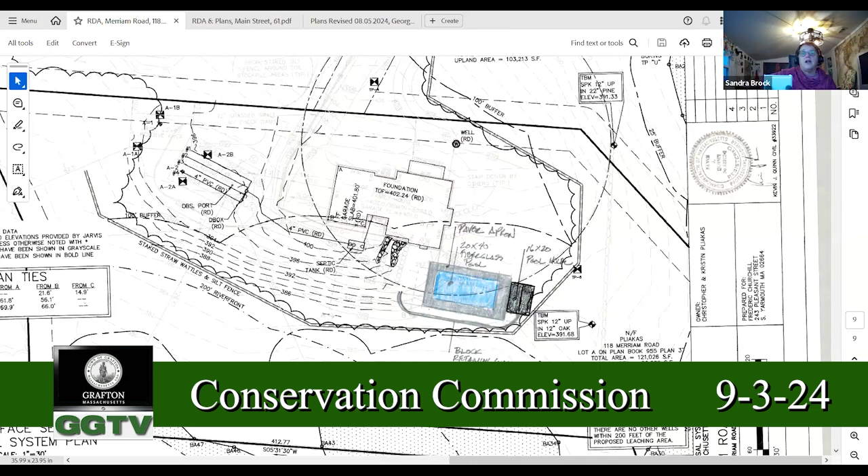So, all excellent. Right. Jan, anyone from the public? Nothing from the public. All right, great. Having said that, let's see here. Patrick, did you have any other questions or recommendations? No, nothing else. Okay, so based on that, I have nothing else. So do I have a motion to issue a negative determination for 118 Merriam Road?

I'll move to close the hearing and issue a negative determination with the conditions as discussed. Thank you. I have a second. Second. Okay, we'll do a roll call vote. Well, Jonathan, you're looking at me, so you go first. Yes. Travis, yes. Patrick, yes. I am also a yes. So that's a negative determination.

So just reach out to staff and they'll give you the details on when it will be available. Fantastic. Thank you. All right, good luck. Thank you. Good night. Good night. All right.

Next up, we're still on here. So, pursuant to the Massachusetts Wetlands Protection Act and the Grafton Wetlands Protection Bylaw, the Conservation Commission will hold a public hearing to act upon a request for determination of applicability for soil borings and construction of monitoring wells at 61 Main Street. And who's here to present that? Hi, Madam Chair. My name is Fiona Coughlin. I'm the town planner for the town of Grafton. I'll be doing an introduction, and I'm joined by Katie Wilkins of Tighe and Bond, who will also be presenting. You have the floor. Great.

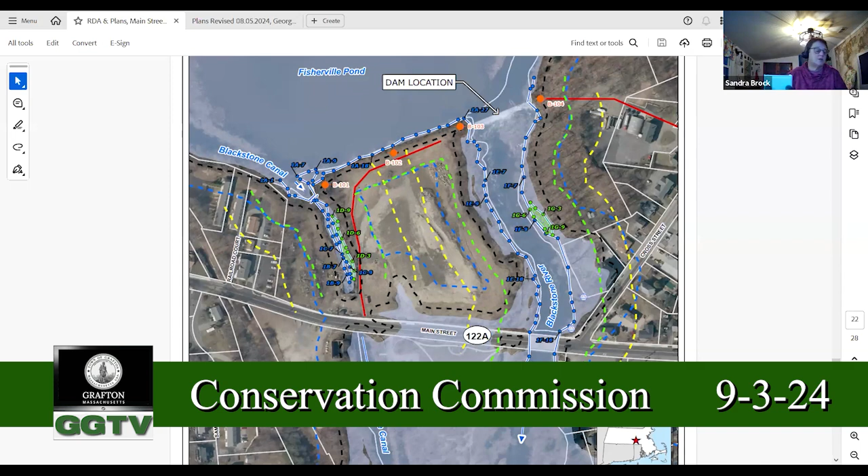No, this is under our local bylaw, so we need that. Okay, so it's just to grant the waiver under no disturb. So I'll move to grant a waiver for work in the no disturb buffer for 61 Main Street. All right. Do I have a second? Second. Okay, a motion, a second, roll call vote. Travis? Yes. Jonathan? Yes. Patrick? Yes. And I am also a yes, so the motion carries for the waiver. Okay. So that's that. And then we've already reviewed conditions. So do I have a motion to issue a negative determination for 61 Main Street?

I'll move to issue a negative determination with the conditions as discussed for 61 Main Street. Thank you. Second. We got a motion and a second. Roll call vote. Travis, yes. Patrick, yes. Jonathan, yes. I am also a yes. The motion carries. Good luck in your monitoring and boring excavation stuff. Thank you. Okay. Thank you very much.

All right. We can keep on going. We're still okay on time. Okay. This one here, that's that.

Okay, next up, 725. Pursuant to the Massachusetts Wetlands Protection Act, Grafton Stormwater Management Bylaw, Grafton Wetlands Protection Bylaw, the Conservation Commission will act upon a notice of intent application, Grafton Stormwater Bylaw permit application, and Grafton Wetlands Bylaw permit for the reconstruction of the roadway at George Hill Road, Fay Mountain Road, and Soap Hill Road. And who is here to discuss that? Eric Olson from VHB, here with Greg Russell and Luke Bocher, also from VHB. You have the floor.

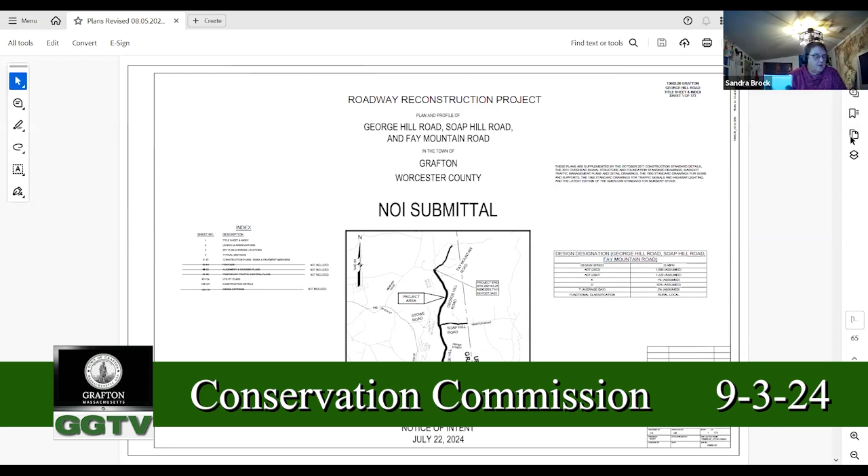Oh, yeah, sure. We have the plan set, but it's a little bit tough. You can scroll through the plans, but it is a long linear project. So when I'm going through these impacts, it's hard to look at one particular page. But if you just want to pick a page with the roadway right there. Yep.

So if you do any kind of presentation materials, just forward it to Jan or Leah. Per state, anything that's presented, we need a copy of. It's easy for us to present things, we just need to have it ahead of time. Okay, my apologies. I usually am able to get control to present. Lessons learned on our part. This is much more successful. I can see that. There's a lot of learning curves with all the different formats.

So go to sheet five, Leah. I'll just run through this quickly. So the 465 linear feet of impacts to bank will require an Army Corps filing as well, so we will be doing that concurrently with this filing. There'll be about 2,014 square feet of permanent impacts to BVW, as well as 1,284 square feet of permanent impacts to land under water.

So the plan is to mitigate for that. Our mitigation measures included in the filing were robust. They included design and construction methods to avoid as many impacts as we could, erosion and sediment controls during construction, and the big one would be the compensation for any permanent impacts. We are proposing 3,300 square feet of BVW replacement. As you noticed in the filing, we do not have a location yet. Greg can talk more to that in a second, but we are working with the town on that.

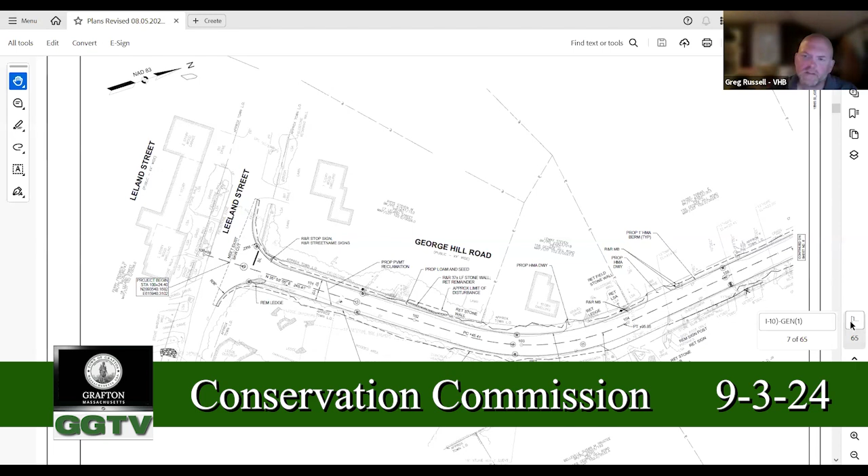Yeah, so my name is Greg Russell. I'm the project manager for VHB. And Leah, if you want to move ahead to sheet 5 of the roadway plans. Or, sorry. Keep going, and you'll start seeing the color. I'm sorry, which sheet did you say? Sorry, on this bottom one. Yeah, it's coming up, the colored one.

Right. So just to quickly go back to what Eric was saying, this is obviously a linear project. So wherever we have impacts, we call them out by color. And they're not continuous along the entire length. But like Eric said, we do have approximately 3,300 square feet of wetland replication that we're looking to construct as part of this project.

And in speaking with DPW, we're looking at the Pell's Farm area on Soap Hill as a potential option, which would also conform with the town's stormwater management plan. This is an area that is part of the MS4 permit, and would assist in allowing some additional stormwater treatment from the roadway off of Soap Hill, or Sokol. And this would be in the general vicinity of where DPW had replaced a failing culvert earlier this year.

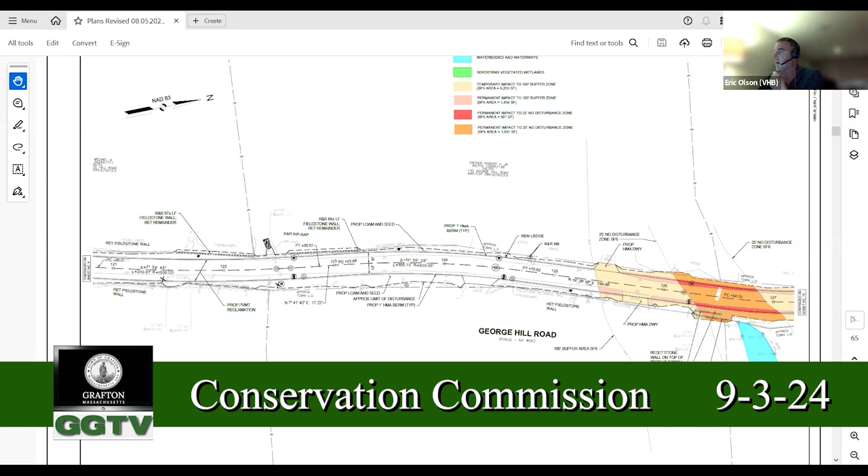All right, the first one is the project narrative and plans indicate that there are 6 stream crossings that will be replaced. The narrative calls these upgrades, however, the proposed changes include increasing pipe length and openness, embedding pipes into the stream bed, etc. Please update the WPA Form 3 to reflect that 6 stream crossings are included in the project. That's fairly straightforward. You'll have a response for that. Yes, we will. Okay, keep on. Okay, the applicant proposes to alter 465 linear feet of bank resource area.

MassDEP notes that the review threshold requiring a MEPA filing for bank is 500 linear feet. So I think it's more just a note saying that if you increase your linear feet too much, you might trip MEPA. But we don't plan to do that, so there's not really a response required, other than we will remain at 465. The next one is the applicant proposes 3,300 square feet. Basically, I can just shorten this one. It's a long comment, but it pretty much says, please provide us with the mitigation area.

So, which we will do. Yep. The next one, table 6, shows increases for the 2-year, 10-year, 100-year, 24-hour storms for design point 2, design points. So do you want to get into some of these? Most of the rest of them are stormwater comments, so I don't know if you want to. So let's keep it a little bit high level, especially if we're going to have a peer review. But basically, you have one design point that's going up, and is there a reason for that?

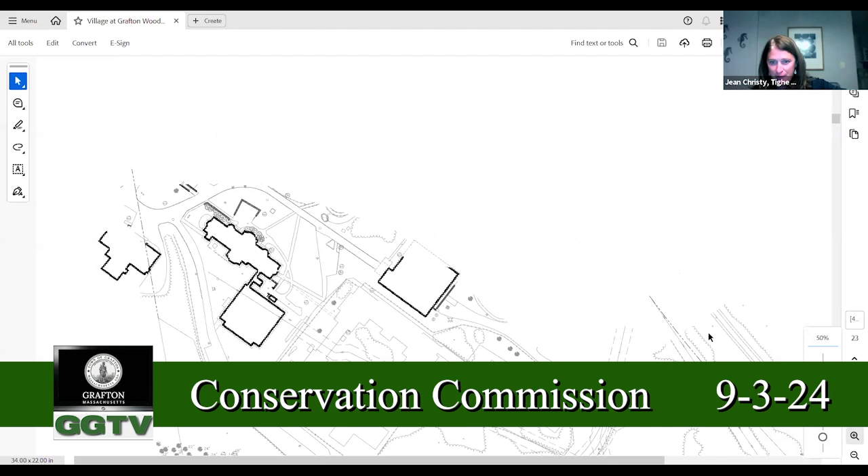This is the parcel that is up against Pine Street, across from Centennial, or I'm going to get that wrong. I need the picture. You see Green Street's on the left and the Shrewsbury town line. You can see the former existing buildings are there in the dark outline. Pine Street's down at the bottom of the plan, running left to right, with north going to the left. So this is 8 Pine Street. The property behind it is 100 Pine Street.

So while the project is really located on 8 Pine Street, there is some jurisdictional work on 100 Pine Street down in that bottom right-hand corner, which we can get into in more detail. But as Sarah had mentioned, the buildings have been demolished. There's been some soil remediation for contaminants. The buildings were abated before they were demolished, and there's still some construction debris piled on site that will be backfilled into the holes left by the building removal.

But really, the wetlands are focused on the right-hand side of the page. If you could zoom in a little bit, you can see them in better detail. So the wetlands are located in the southern portion of the site, up against the MBTA rail line. That's those parallel lines running on the east side of the plan there. So Jan, if we want to go to the next couple of sheets, I'm sorry that I don't have a good overall plan. Maybe sheets 103 and 104 are the two we're going to want to look at.

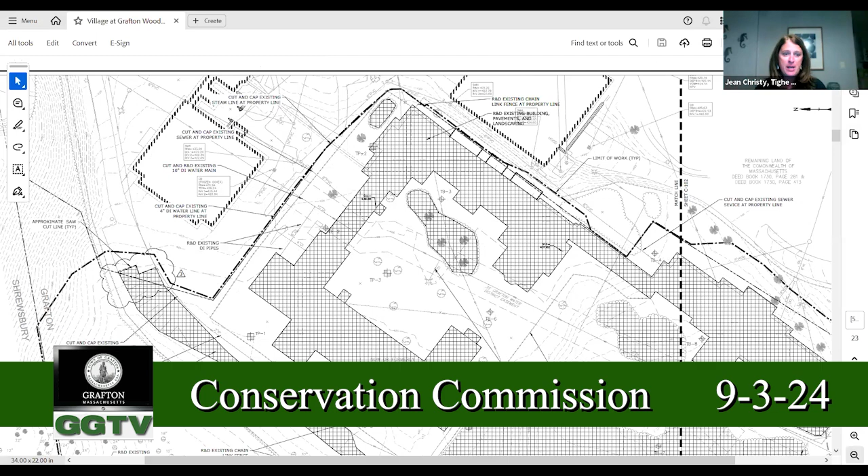So the project is a development of 316 residential housing units and approximately 11,600 square foot footprint of a retail component. This is under the North Grafton Transit Oriented Development, if I got that zoning right, geared to provide housing with convenient access to the commuter rail line. On this left-hand side, the northern side, is the 4-story residential building, 316 units with a multi-story parking garage in the back. So there's no significant surface parking lot associated with this development.

And if you go to the next sheet, Jan, we can see the project as it impacts wetlands. Across from Centennial Drive, in the middle of the plan, with the residential building on the left-hand side and the commercial building on the right-hand side, there is an access road that goes from Pine Street into the DCAMM property. There is an access easement there today that we are maintaining through construction, to provide DCAMM access for some of their larger vehicle deliveries.

So the whole right-hand side of this project is really where we have wetland impacts. There is work within the 25 to 100 foot buffer zone. There is no impact within the 25-foot buffer zone. We do respect that no disturb line. The wetlands here are bordering vegetated wetlands. There's some inland bank and land under water.

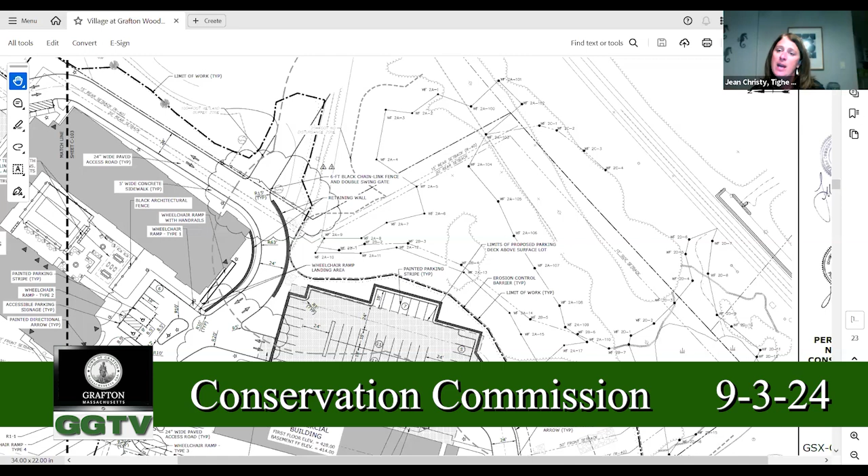Mass DEP did issue comments, and we were able to respond to them last week. They were actually very similar to the comments they issued back in 2021, with the addition of a couple new ideas. The biggest one, present in a few different comments, was related to where groundwater is. The subsurface investigations we have to date were performed really early in the project, and as the project developed, our stormwater management systems changed. So where we thought we would infiltrate, we are no longer infiltrating, and so we will need additional subsurface investigations.

Under our previous order of conditions, we did have one that required that we perform these investigations prior to construction and have a peer reviewer opine on them, make sure that they are correct, and that any design modifications we have to deal with will continue to meet all the state and local stormwater requirements. So we're hoping that we can consider that same kind of condition here.

A couple of the other pieces of Mass DEP's comments were making sure that we have the street sweeping requirements fully detailed out in our operation and maintenance plan, including a map with that. We looked at one specific outfall that's not using groundwater recharge as a treatment, and we're explaining why we can't do that because of limited space, and we're able to accommodate our required recharge volume elsewhere on the project.

I'm sure I missed something that we need to talk about, but I think those are the big things. So I guess I can turn it back to you all for comments and questions.

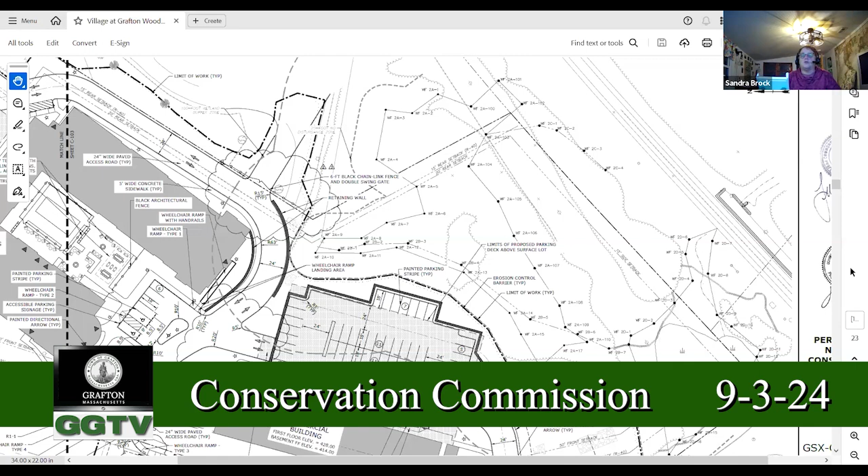Right. I understand building debris and how they're classified and that you can use it as fill. It'd be a good idea to have that located on the site just to make sure no one has surprises during construction. I'm sure there had to be an as-built as part of that permitting process. It's coming. Yep, it's coming. Okay.

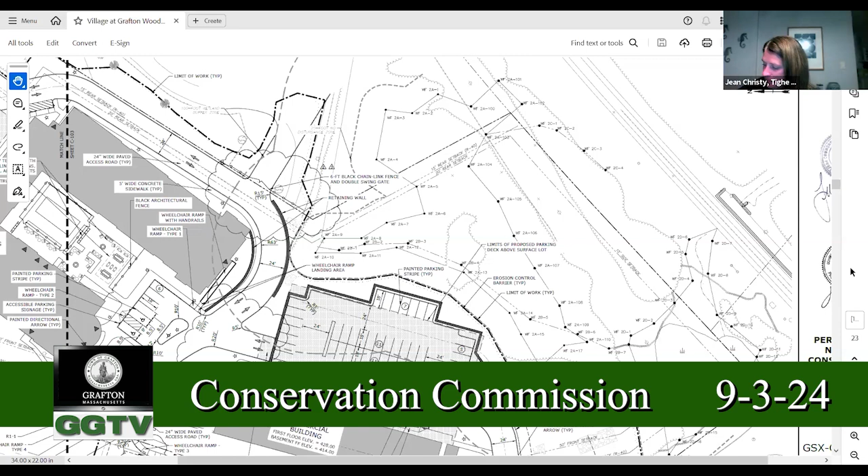All right, let me go around to the other commissioners to see if they have questions. Jonathan. No, I don't have any questions. Thank you. Travis. No questions. And Patrick. No questions. Leah, you want to give us your report? Sure.

So as Jean mentioned, the DEP comments were very similar to last time, so we have a lot of them handled through the conditions we wrote last time. I think we have everything covered between what she presented and the conditions in terms of what DEP had to say. The only other thing I called out was a waiver request for phasing. They need to exceed the 5 acres per phase for phases 3 and 5, so they are requesting a waiver from that. Okay. Is that alteration already done?

No, phase 3 is the residential building construction. Okay. And then phase 5 would be site restoration. So I expect that as we're going through phase 3, we're stabilizing everything with at least seed down, so phase 5 assumed everything needed to be fully stabilized as a worst case.

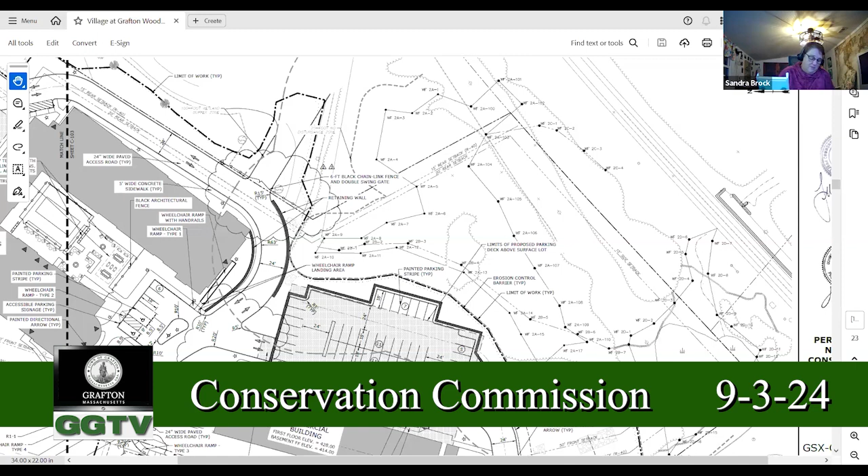having gone around, do I have a motion to grant a waiver from the 5 acres for the phasing? So moved. Okay. Second. We have a motion and a second. Roll call vote. Jonathan, yes. Patrick, yes. Travis, yes. And I'm a yes, so the waiver's been granted.

Next one, Leah, can we just recap what the conditions are at this point, so we can get them all in? Sure. Do you need me to read from the old order, or can I just say we would be utilizing what was in the old order and then proceed from there? I would say use what was in the old order that we had already voted on, and then go beyond that. Okay, so we would build off of those conditions and findings, and add. Let's see, where are we?

Revised site plans, including the additional water quality features to meet the new stormwater bylaw regs, shall be provided prior to commencement of work. A signed illicit discharge statement shall be provided prior to commencement of work. The applicant shall check the current limit of disturbance and ensure that it did not encroach on the previously approved limit of disturbance. What else? And then just the peer review. The peer review, right, we will

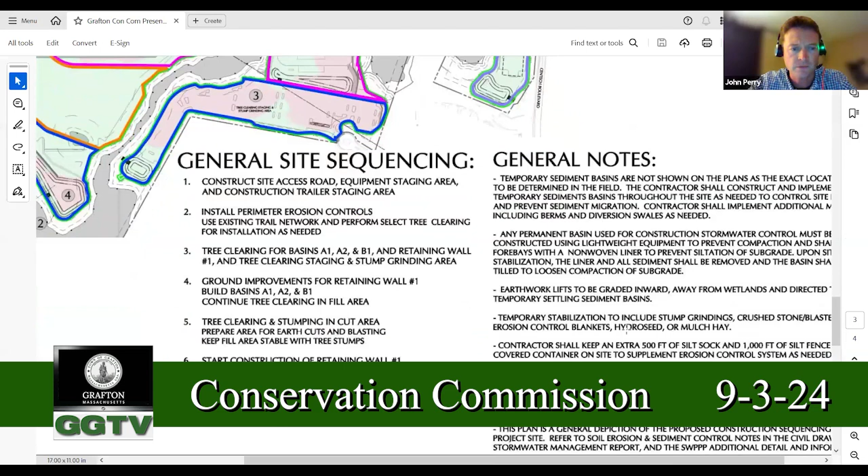And if you go to the next sheet here, just zooming in on some of the detail, we tried to blow this text up as much as we could. I know it's still a little hard to see, but I wanted to point out a few additions. Oh yeah, that's great. So on the left side there with the numbers 1 through 7, that's exactly what I just explained with the slight differences in the sequencing.

But under the general notes there, we've included more detail. A few of these notes were on the original plan, but I think there were some questions regarding what will actually be on site for extra erosion control systems to be used in case of a pop-up storm or some type of emergency. So we've added information to that effect. Now I'm just going to go through these bullets one at a time here.

The first one is just noting that temporary sedimentation basins will be installed and implemented. Some of the permanent basin areas will be used for temporary construction stormwater basins. They'll be protected with filter fabric, and they'll be in stone as well, and they'll be cleaned and reconstructed in the final condition. Those are the first 2 bullets essentially.

The third bullet is new, and as the contractor's building the site in lifts in the fill areas, they'll be grading ever so slightly inward towards the site. So as they're building it up, think of it as steps. They need to compact vertically on a horizontal plane. They're not going to be building slopes. They'll be building it almost like a staircase, if you will. But each lift will be graded ever so slightly inward, so they can direct stormwater flow away from the wetlands and towards the temporary sedimentation basins. And that will be done through a series of swales with check dams. They'll be stabilized as well.

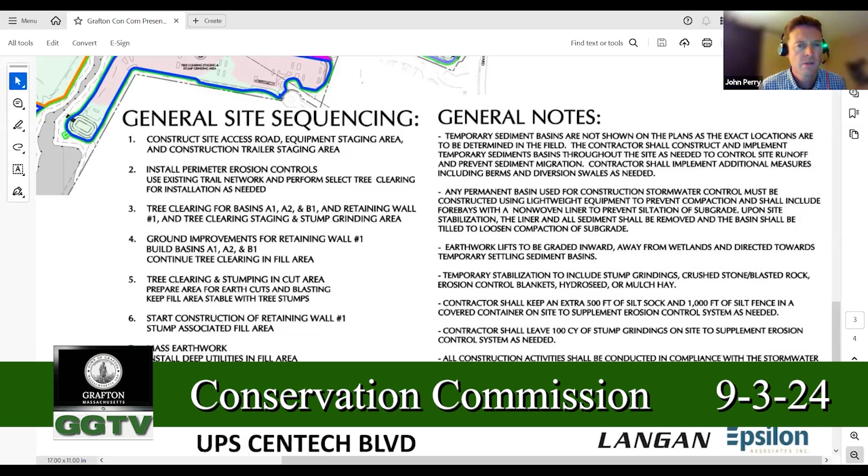And a few other things that I wanted to mention too, just to remind, these are the additional items that we've proposed in addition to our original erosion control plans. We've also added, if you could zoom out, Jan, just a little bit on here. We'll be building berms too along the long thin wetland series that is between the employee parking area and the main warehouse area that kind of goes diagonally north to south. We'll be building berms along the limit of work there, so that we ensure that any runoff will be running along those berms as opposed to in towards the wetlands as well.

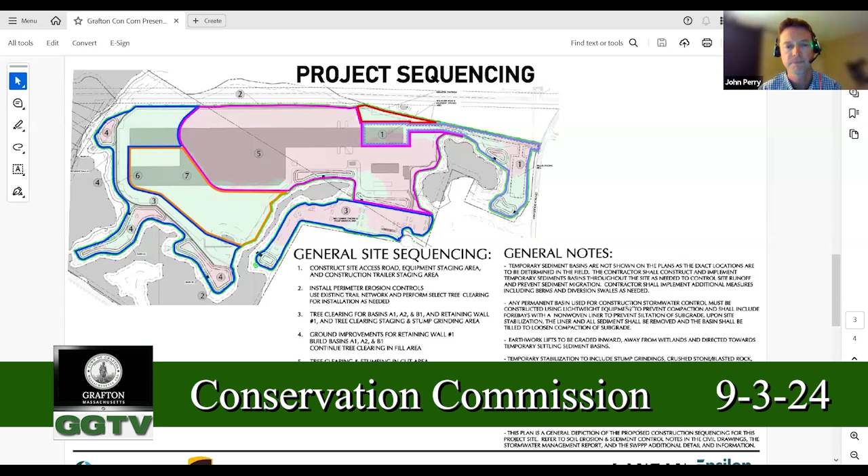So all that will be the method used to minimize disturbance, maximize maintaining stumps in the ground, maintaining and using crushed rock. There'll also be intermittent rows of silt socks, which were shown on our erosion control plans. We feel we have a very robust plan, and we will be taking great care. The contractor will be taking great care to make sure that this is done in compliance with this plan and minimizing any potential for runoff to the wetlands. So next slide, please.

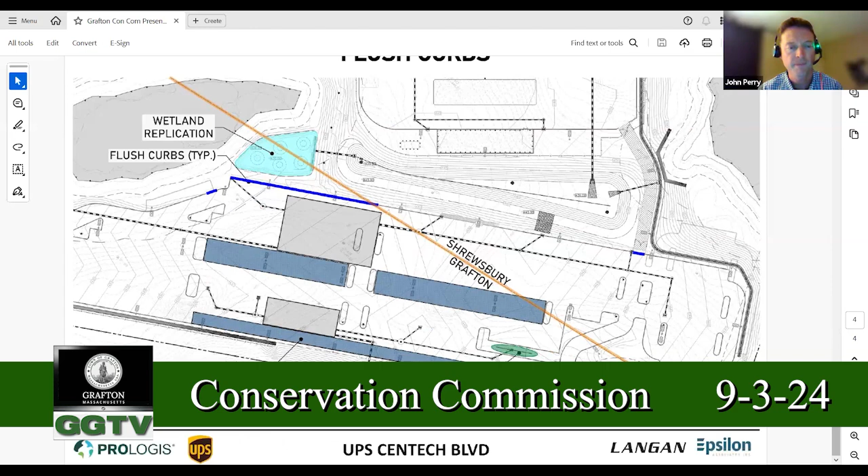And just one other thing we want to present here. This sheet we showed last time, and it shows the porous pavement areas, it shows the rain garden, it shows the new wetland replication area that we discussed last time, and I believe was well received. One thing this shows in addition, and this came up, it was a question from the Shrewsbury Conservation Commission, in the blue, like the royal blue color. They had asked, well, what if any wildlife ends up somehow in the employee parking lot? Are there flush curbs so that smaller critters, if there are any, would be able to get back out of the parking lot and back into the wetland areas?

And we pointed out a few areas where we do have flush curbing, specifically page right there where we have the emergency access road, and then a long strip where we have our accessible parking. That's all going to be flush curbing. And then we included another one just in case any critters wander into the parking area, which I feel is unlikely, but again, could happen. Another curb cut there, kind of page left as well. So those are the updates.

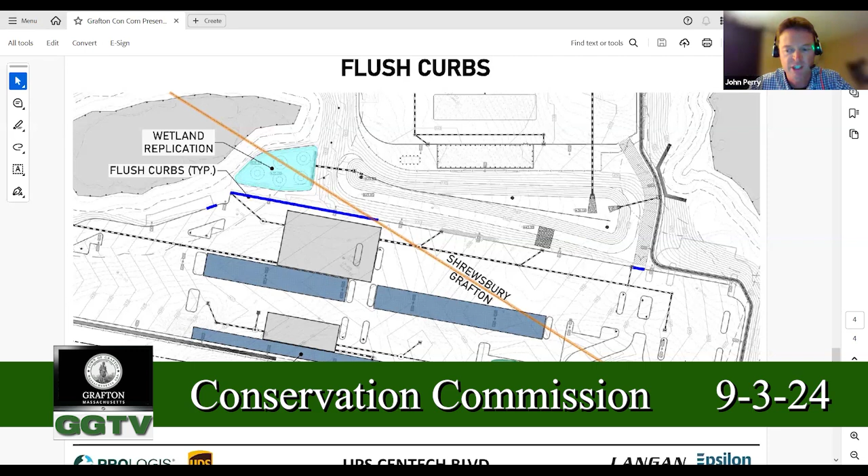No, the temporary sedimentation areas will not be infiltration areas. If those are implemented in the same area as our post-construction infiltration basins, they would be lined with filter fabric. They'd be stabilized. There'd be light equipment on there, and that would all be completely taken out. All the silt would be completely taken out. The filter fabric liner would be removed. That would all be tilled up and rebuilt according to the plans.

Typically in the past, I mean, I certainly don't have an issue with it. Typically in the past, we've had a condition that says your sedimentation basin has to be at least 12 inches above your proposed infiltration basin bottom elevation so that you're not ripping things out and expecting that surface to infiltrate. You're actually having to over excavate. It's a fairly straightforward protection, you're letting the soil protect the soil underneath it. So in addition to everything else you would be doing in the sedimentation basin. That was kind of my quick questions.

I will go around based on what was presented tonight if any of the other commissioners have any questions. Patrick. And actually, let me take one step back. Patrick, you are not eligible to vote. If you wanted to ask a question, you can certainly ask it as a citizen, but because of the number of hearings missed, you won't be able to vote on this particular project. Sorry about that. Jonathan, any questions? No, I didn't have anything additional. Okay, Travis?

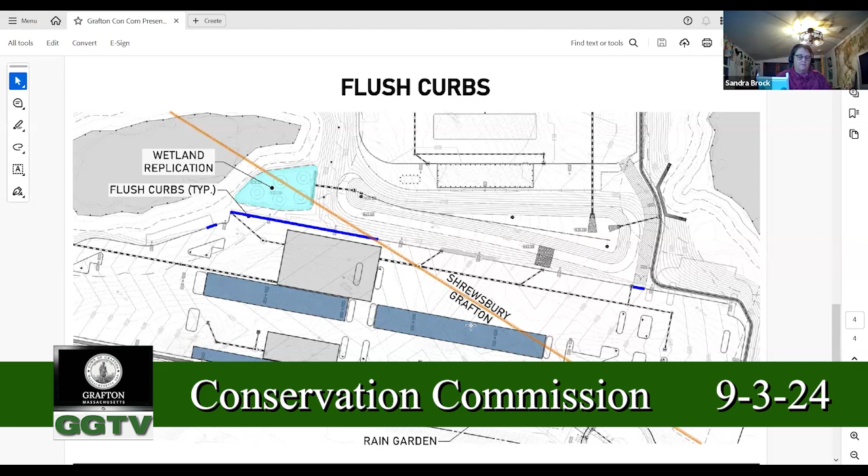Having said all of that, are you looking to continue to our next meeting on September 17th? We are. And one last question, going back to the waiver request, the vote for that, I suppose. It seems like I'm picking up that you are going to be more comfortable finalizing that once we work out some of the conditions regarding erosion control monitor or things like that. Correct. Yep. Okay. Yes. Understand. Okay. And the things like disturbance within the no disturb areas. I mean, there are certain times where you can't avoid it, basically if you're crossing someplace, but those are things that we'll look at. And as Leah said, she's got a nice long list here.

So, okay. But yeah, so if you're requesting a continuation, no other attendees have raised their hand. So do I have a motion? Whoops, I'm sorry, Jonathan, are you raising your hand again, or has it just been up there for a while? No, I am. I'm sorry. Just one more time, kind of similar to the last time before we continue.

I just want to make sure, and sorry if I do sound like I'm repeating myself, if there's anything that we can do, just to make sure that we're not missing anything on the waiver. I put a lot of focus there just because we do care how important it is to the commission, and we took great efforts in trying to make sure we shared a plan and a process that the commission could wrap their hands around. So the only thing I don't want to leave this meeting on is not understanding fully if there's anything else within our ability outside of the commission speaking that we can do to make you feel comfortable to go ahead and vote for that, because that's just something that feels like we hit it.

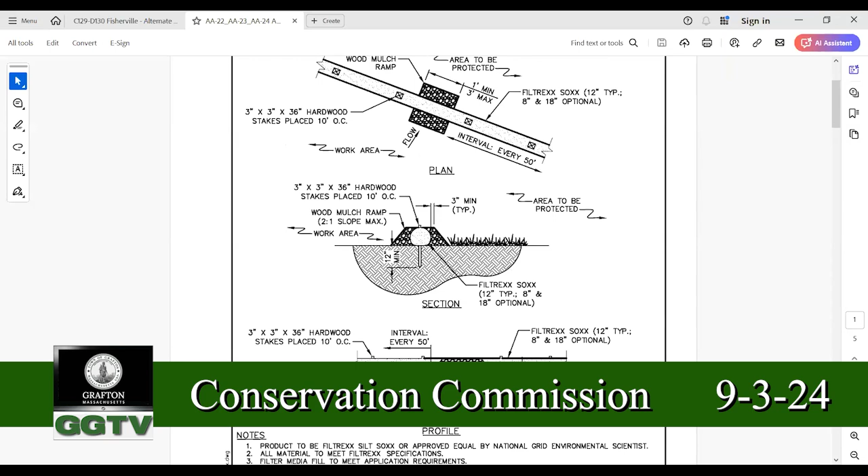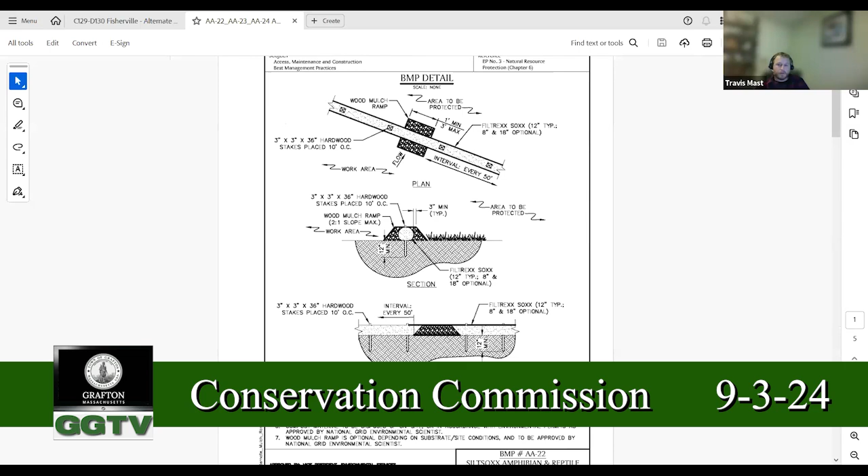Also, are there any monitoring reports that the wetland scientist would draft? And if so, can those be shared with staff? Yeah, for sure. So we normally go out there every week anyways, and we have a wetland scientist do a full inspection of the site. And that gets shared with the whole environmental team from National Grid as well as the construction team. So it would be very, very easy for us to have the scientist write up a report for any time that access is traversed between September 1st and October 15th, and share a report with the commission.

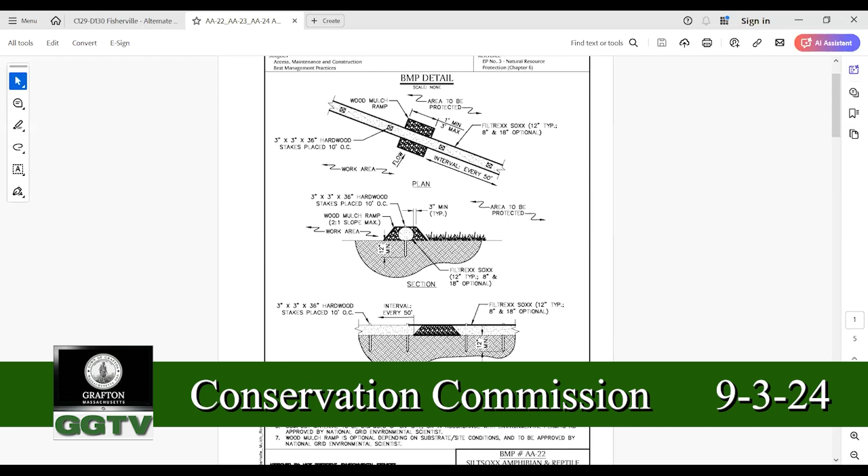All right. Nothing else for me, Sandy. Okay. Leah, any of your recommendations or anything else? I do just want to add that there is the second date range of March 1 to June 1. I think it's their intention to be finished with this before then, but just so that we're noting both of those time periods. Okay. Yeah, I mean, anything to get the work done faster, I think is probably a benefit to the impacts to the wetlands. And getting some sort of monitoring report would be helpful to keep track of what's going on.

Okay. I had a quick question and a comment, if it's all right. Sure. So Olivia, what are the spill protection or prevention measures installed beneath? Is it like an oil or gas control system? Is there a full plastic or poly system that's going beneath this heavy equipment, an excavator, drill rig, etc., so oil and gas aren't dropping out? Is it under specific areas? What I'm looking at from the report might be a little condensed, just kind of what the measures are, but I don't know if they've been spelled out as to what that is and how that works, if it's being stored out there for time during that period. Yeah, thank you for the question.